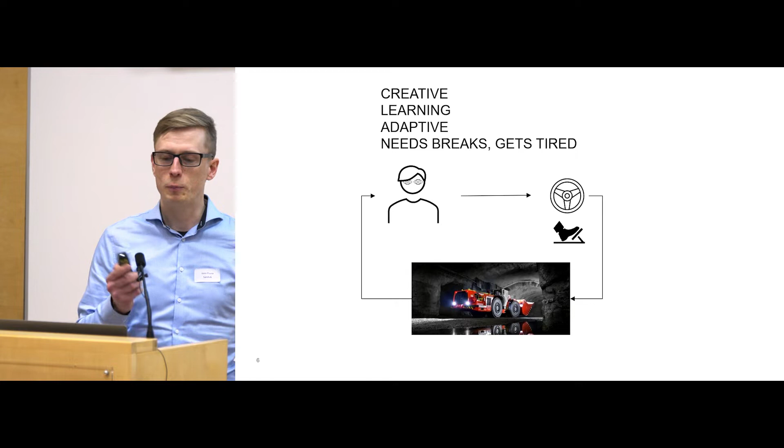So, naive approach to safety, AI, why would we do AI? People are great, they are creative, they learn, they get better, they are adaptive, but they get tired, they need breaks and so on. Then you have one Kimi Räikkönen and then the rest of us and then some other people. So it would be nice if you could replace the person with something that's creative, learning, adaptive, and you can copy the Kimi Räikkönen and put him in every car. That's the naive approach. And of course this is not a product architecture, but you can try this, and we have tried it.

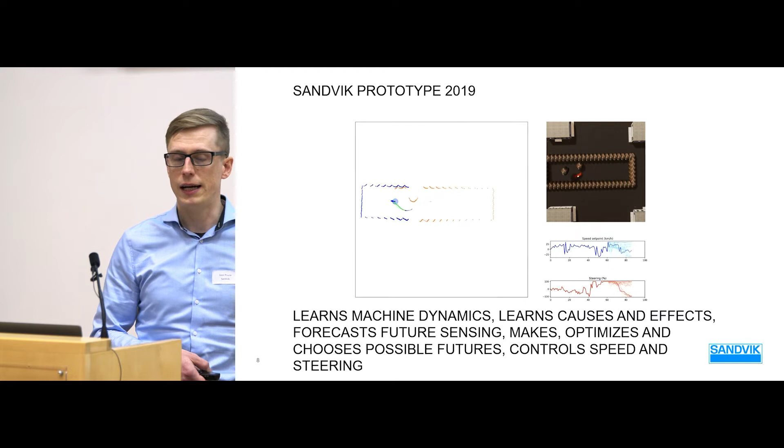This is one of our intermediate solutions from 2019. It's actually AI that sees the sensors, sees the speed, sees the steering, sees the location, and then directly controls steering and velocity, and adapts to the situation, learns the machine dynamics, learns causes and effects, forecasts what the sensing might be in a moment, what I suspect that I will see in a moment if I continue like this, makes possible futures, optimizes those futures and selects the best future, and then actuates that into steering and velocity. It works great. It can find its targets and adapt like a human to what it sees.

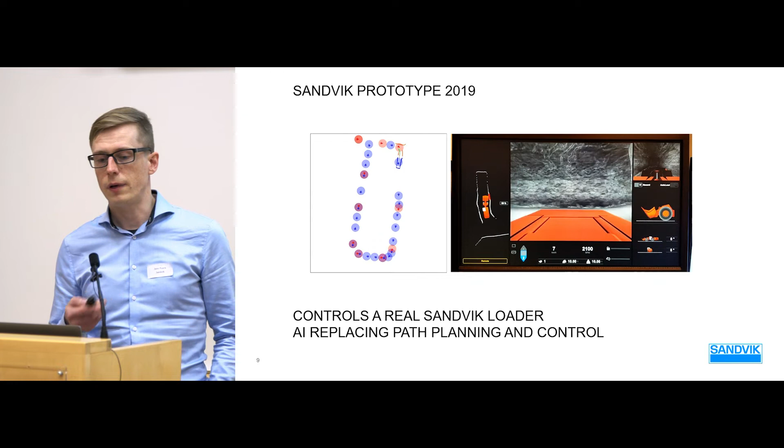We also tried this actually so that we taught it in a simulator and then tested it against our actual control system. So here's our actual loader with the actual physics, and it turns out to work quite well.

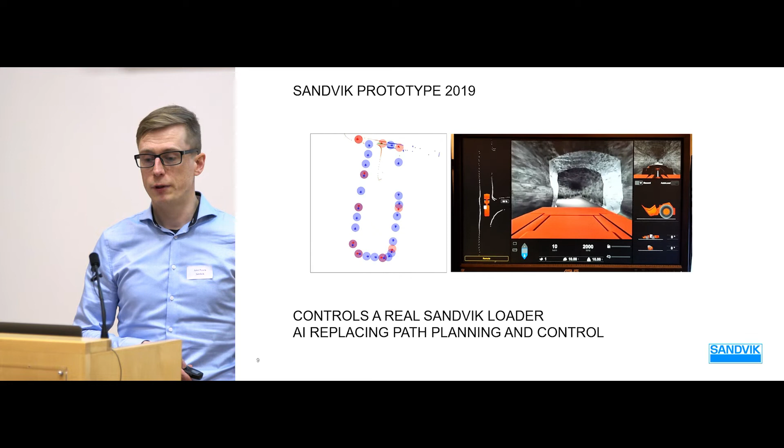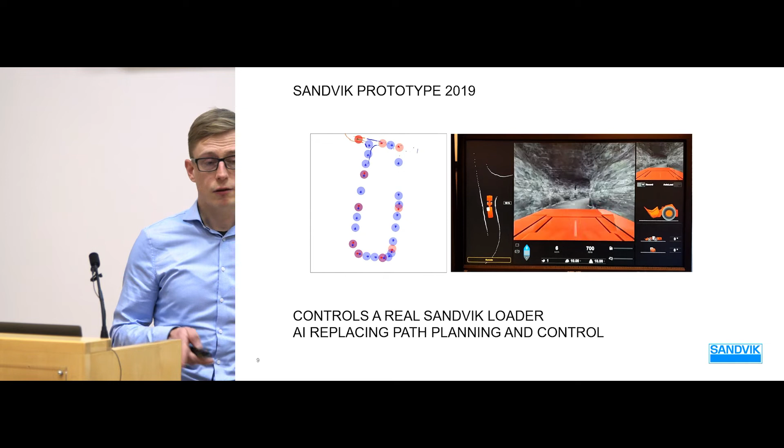So it replaces the path planning and control with a learned AI. But this is not the solution we went with on the concept machine. And the reason is that this sort of AI is creative in a sense. I can't say what it will do in 0.2 seconds.

And after that, will it make a mistake that it can't recover from? If it did something, why did it do something, and can I replicate it, and so on? Can I live with it as a normal service guy for 10 years on the market, on every mine site, and so on? So the creativity, living in the moment, is the biggest pro and con.

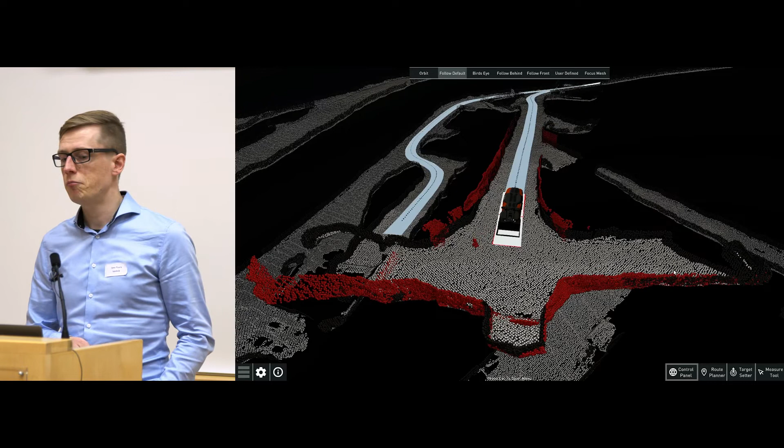What we actually did is we used the same-ish solution and got the creativity and adaptivity, but in planning. And then we use good old-fashioned control theory to execute the plans with very good precision. Because we are really good at that, and that I can explain. Plus this I can reuse.

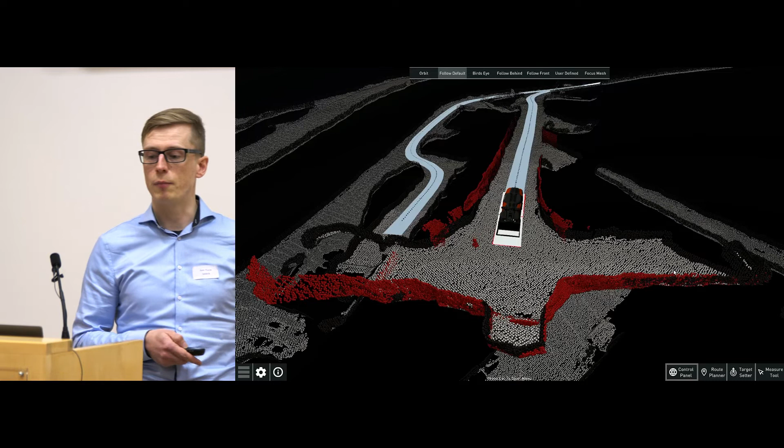I can drive these paths autonomously, but I can use them in planning, guidance, helping people make better solutions as well. Plus the AI can make a creative solution, and I can check the solution with traditional understandable metrics and make sure that it's safe, and then allow it to be executed. And I can reuse this. It's not a big monolith, but a clean, nice solution that I can reuse in other places.

I wouldn't build the safety into the AI. How can I explain it? It gets too big. But what I would do is shown here with our real concept machine. So let the AI be creative, let it do the job as well as it can, and then have another system there

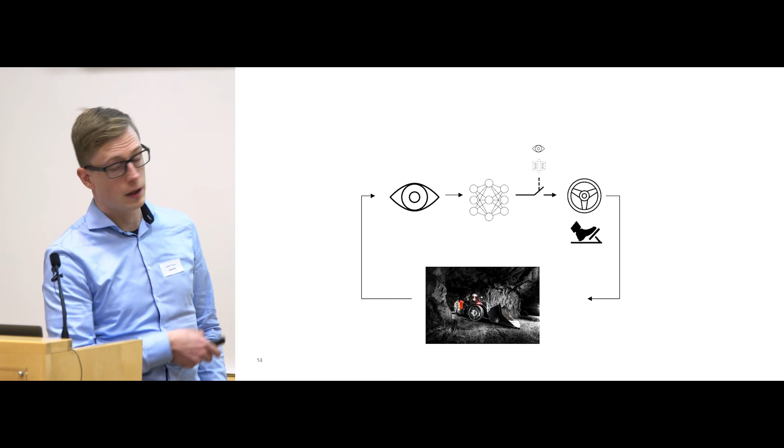allowing it or denying it, and if the AI wants to drive full speed in a circle, let it, it's okay. If it's about to lead to a collision, let's stop it. But have the AI learn that the safety system will stop you if you do this sort of thing. That's something that I could actually maybe achieve and sell, this kind of bystander safety system, or a monitoring safety system.

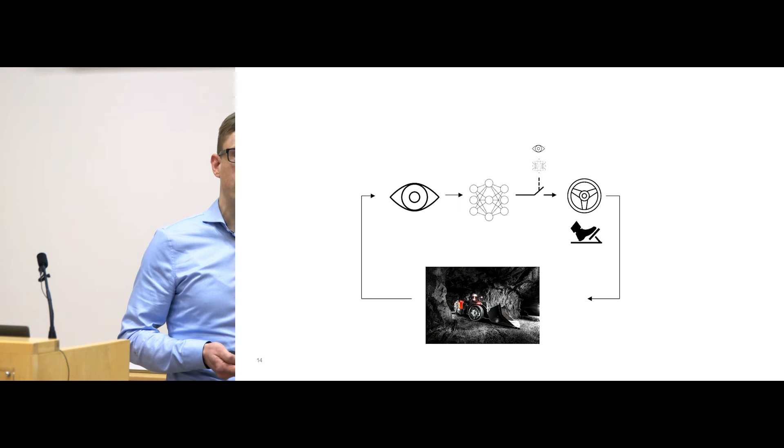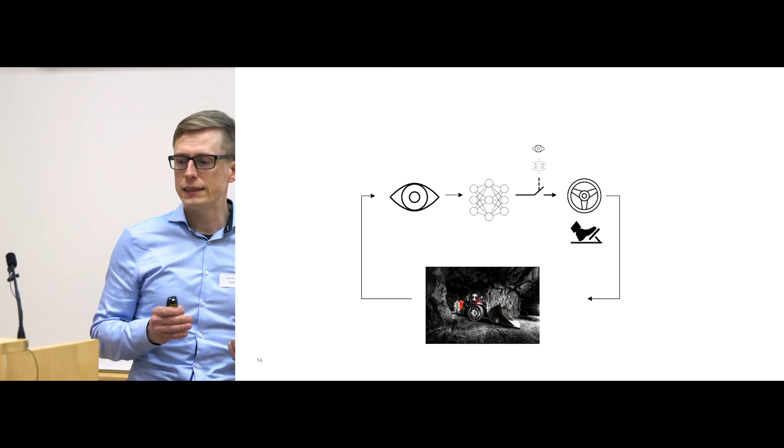And this smaller system's target is now not to make the right decision, like fail operational all the time. It's not like if I stop controlling the machine, a plane will fall from the sky. It's always safe to stop. This guy has a much easier job. Does it look dangerous? Can I allow this to continue or just stop?

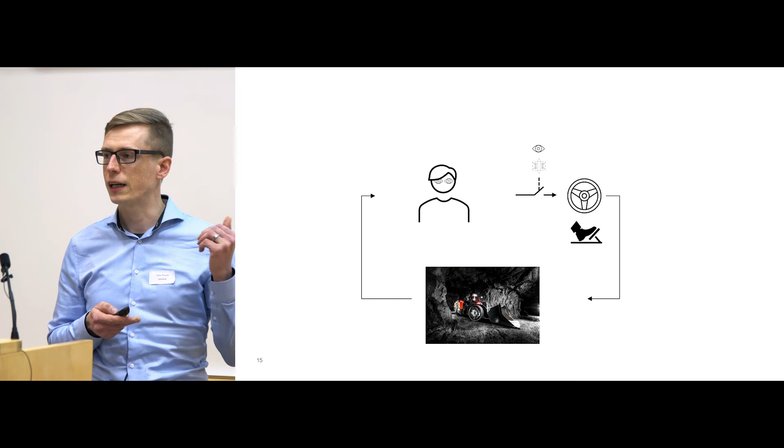Easy decision. And if I make 20 of those decisions in a second, and my time from detection to danger is 2 seconds, if 18 say that it's dangerous and 2 say that it's not dangerous, I'll stop the machine and it's going to be safe. So this sort of system I can live with. And if I had this kind of safety system on the side, does it really matter if it's artificial intelligence or real intelligence? So we can also make the people safer with this kind of system.

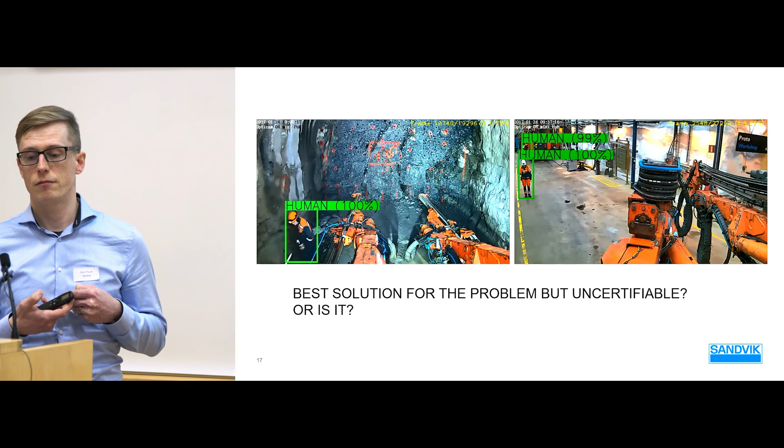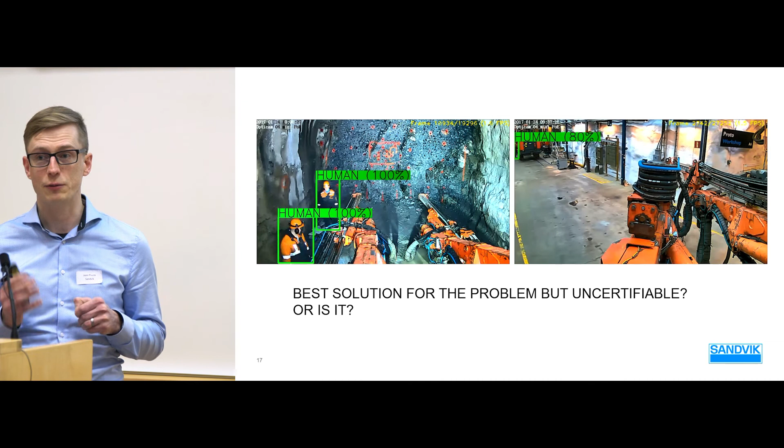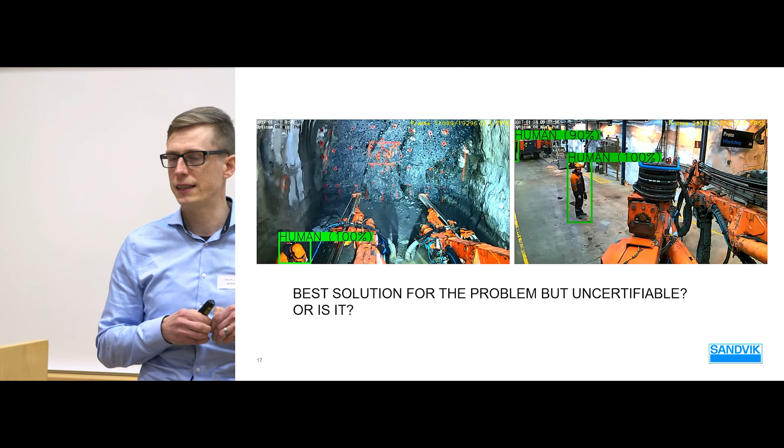Now, AI in safety is really interesting as well. If you keep the safety concept simple, you ask a small enough question, like is there a person in this picture? If there is, we'll stop. It's much harder to ask what's the right steering decision to do in this moment. But it's much easier to ask: is there a person in the danger zone? Should we stop, and rethink, replan, restart, and so on.

And this is excellent technology. Our environment changes, it's always different. Really complex situations, moving booms, hydraulic hoses, and so on. Tell me one other technology that can detect that person there without putting a marker on that person. So I think this is the best technology for this problem, detecting a person in danger.

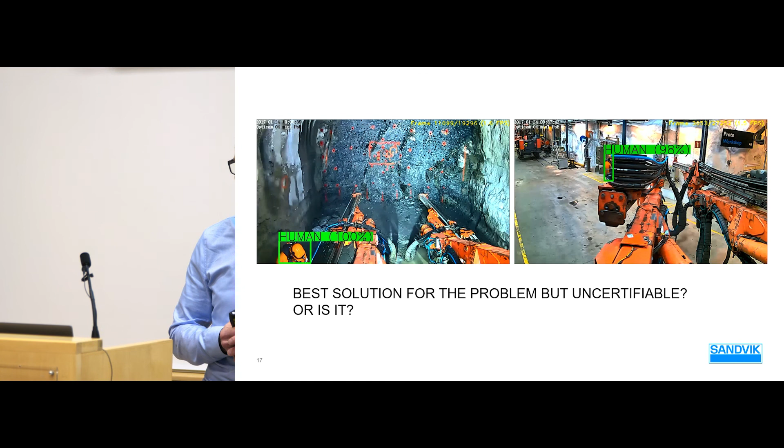But for some reason I can't use it at the moment in safety systems because I can't prove it or explain it. So I'm looking forward to, for example, Saeed's work on that topic. Maybe in a few years we can do a safety product this way. All right, that was my last slide on the topic.